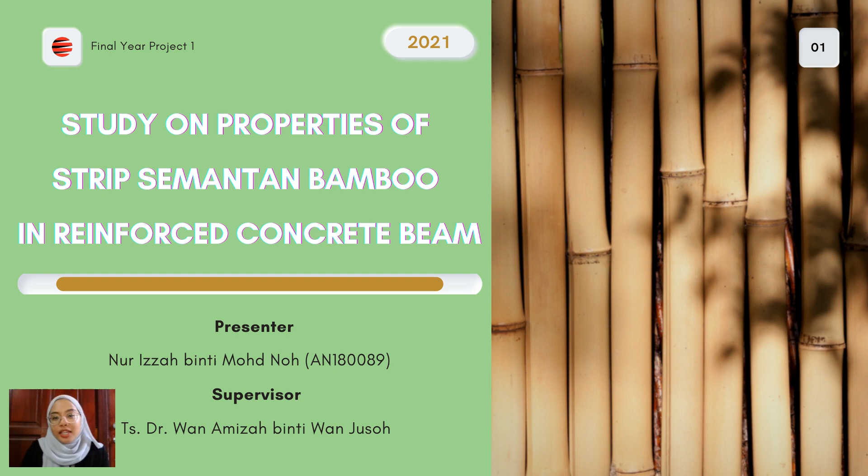Today I will be presenting my proposal entitled Study on Properties of Strip Semantan Bamboo in Reinforced Concrete Beam. In this proposal report, I'll be highlighting the introduction, problem statement, objective, scope of study, methodology, expected outcome and also references.

Based on previous study, it is stated that bamboo implementation in structural reinforcement was established about 5 decades ago. Apart from that, much research and work has been done to enhance its application in structural elements, either with treatment or not. On top of that, over the years, BRC has been exploring various types of bamboo species in the world to find the most suitable and strong species as a steel reinforcement replacement.

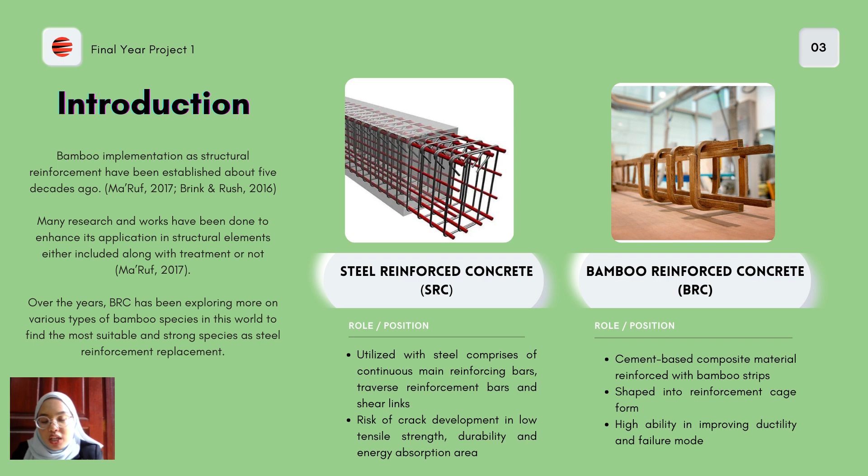As you can see in my slide, I have differentiated between steel reinforced concrete and bamboo reinforced concrete. Steel reinforced concrete is utilized with steel comprising continuous main reinforcing bars, transverse reinforcement bars, and shear links. It has a risk of crack development in low tensile strength, durability, and energy absorption areas. Meanwhile, bamboo reinforced concrete is a cement-based composite material reinforced with bamboo strips. It is shaped into a reinforcement cage form and has high ability in improving ductility and failure mode.

For my study, I would like to emphasize 3 problem statements. The first one is that the conventional method of reinforcement using steel leads to adverse environmental impacts such as high energy consumption during the manufacturing process and emission of carbon dioxide. The second one is the limited utilization of bamboo in civil engineering structural construction, despite its powerful properties and abundant availability in Malaysia. And the last one is steel reinforced concrete facing failure and deflection once a critical load is applied. Therefore, concrete with continuous reinforcing bars deals with the risk of crack development in low tensile strength, durability, and also energy absorption areas.

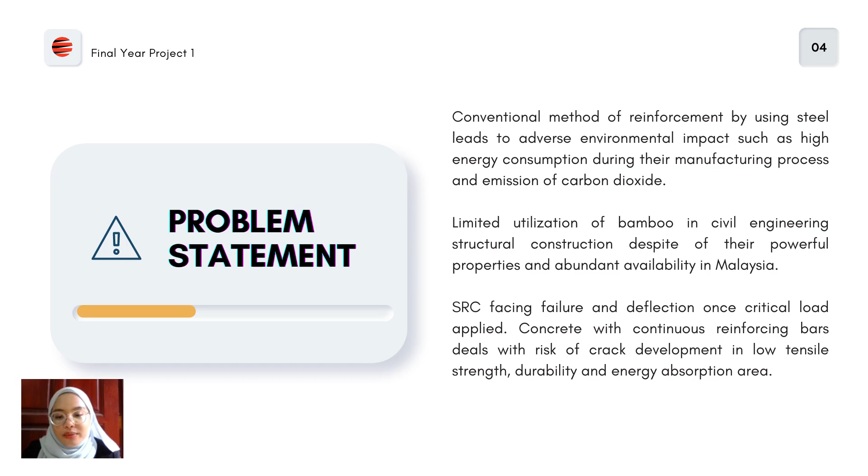Next, for this study, my objectives are firstly to characterize the physical treatment process of Semantan bamboo to be utilized in bamboo reinforced concrete. The second one is to determine the mechanical properties of bamboo reinforced concrete. And the last one is to verify the application of bamboo strips as reinforcement in bamboo reinforced concrete beams.

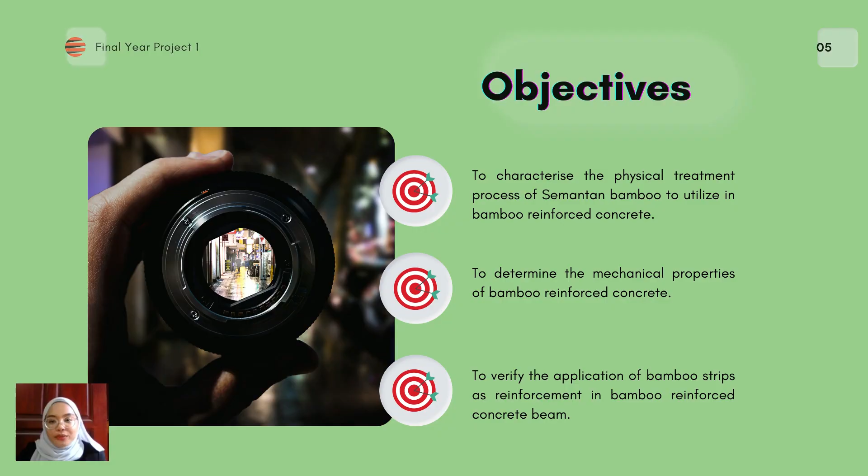For the scope of study, I use Semantan bamboo of 3 to 4 years maturity, ranging from 60 mm to 150 mm, with 3 meters tall. Next, I use a boric acid treatment process for treating bamboo culms before they are utilized in the bamboo reinforced concrete beam model. Third, my compressive strength test will follow BS. The flexural test will also follow British Standard. The water absorption test will follow ASTM and my slump test will follow British Standard also. Next, I will use a total of 36 concrete cylinders for compressive strength, water absorption and UPV tests, and another 18 concrete beams for the flexural test.

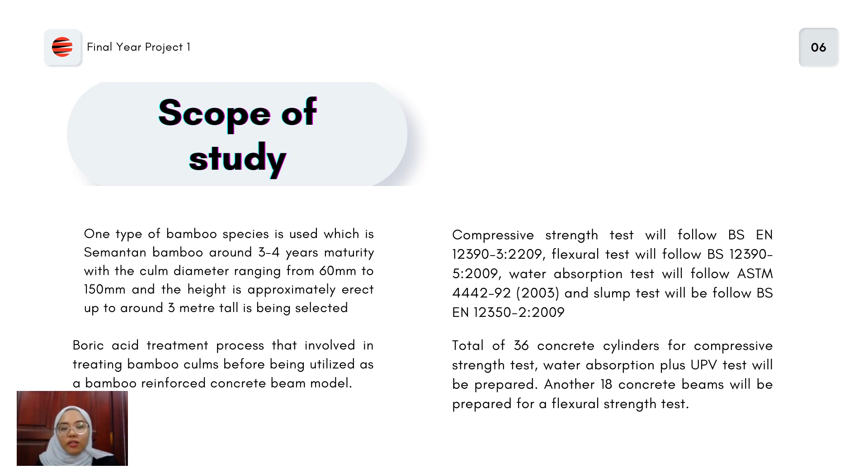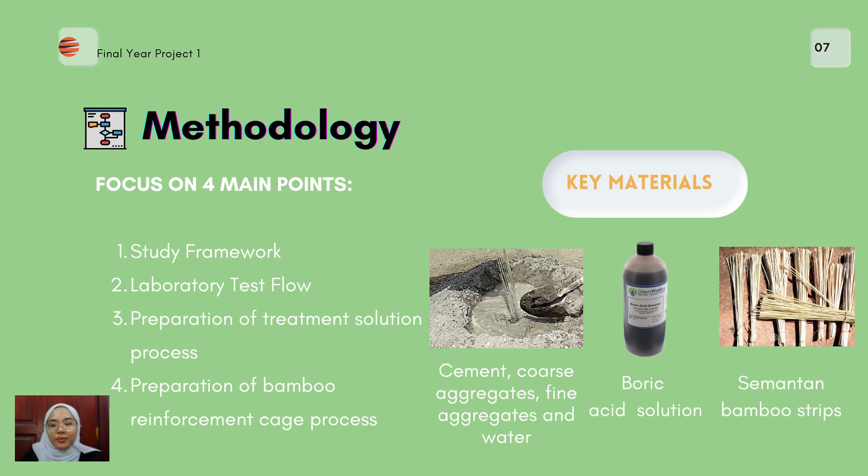For the laboratory test flow, it will involve 5 different actions and steps. The first one is material preparation of concrete, treatment solution, and bamboo reinforcement cage. The second will be conducting a slump test. The third action will be a total of 36 samples of concrete cylinders and 18 beams are produced.

The fourth one, 36 concrete cylinders are being cured at 7 and 28 days. Meanwhile, 18 beams are being cured until 28 days only. The last one, compressive strength, flexural strength, water absorption, and UPV tests will be conducted.

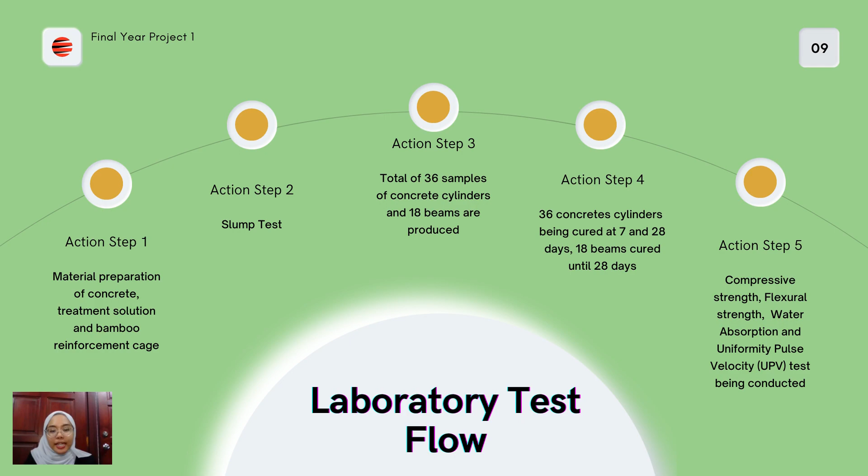In the preparation of the treatment solution process, the first step will be cleaning out the bamboo using water. The second step will involve perforating the bamboo nodes by making holes for easier and faster penetration. Third, it will be submerged in boric acid treatment solution within 6 to 20 days, depending on the solution's concentration. And the last one, letting the bamboo culms aside to drain the excess boric solution.

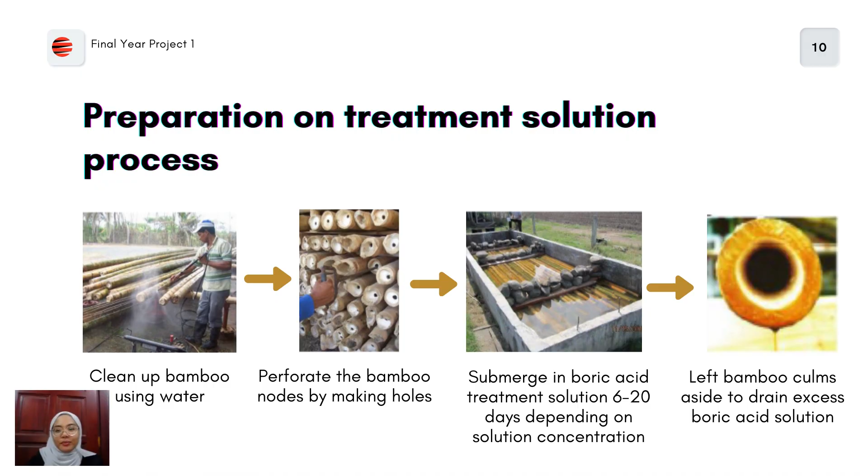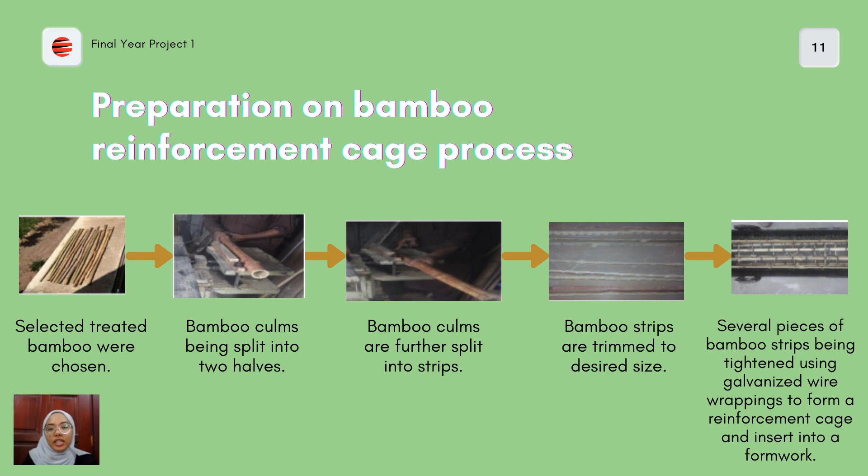Next, for the preparation of the bamboo reinforcement cage process, the first step involves choosing selected treated bamboo. Second, bamboo culms are split into two halves. Third, bamboo culms are further split into strips. Fourth, bamboo strips are trimmed to a desired size and thickness. And lastly, several pieces of bamboo strip are tightened together using galvanized wire in order to form a reinforcement cage, which can then be inserted into a formwork.

On top of that, I've determined a mix proportion of concrete by using the DOE method. As you can see on this slide, on the left side, I've shown specimen details of my study. Meanwhile, on the right side, I've posted quantities required for the concrete matrix and also quantities required for samples of concrete.

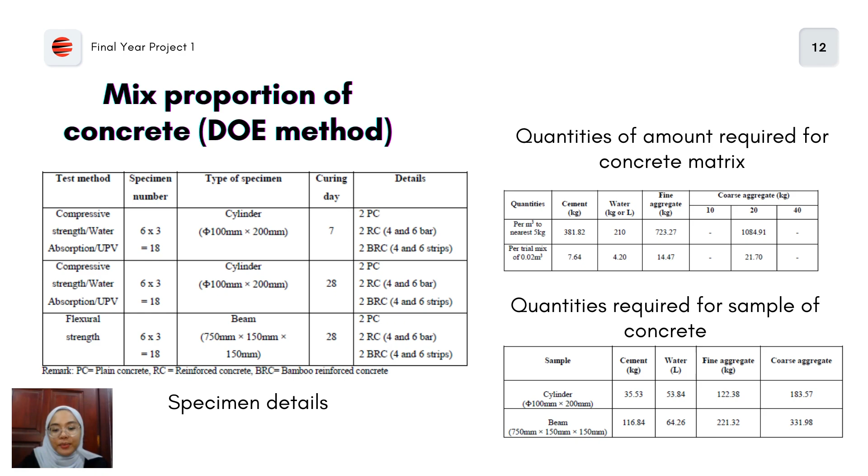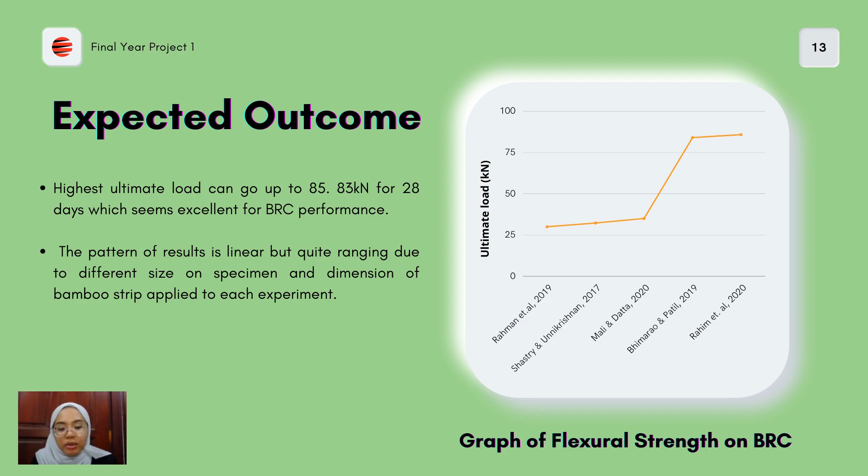For the expected outcome, I've come up with a graph on flexural strength of BRC. As you can see, I've differentiated between 5 different authors, with the highest ultimate load recorded by Bhimarao and Patil 2019 with a reading of 85.83 kN ultimate load. Therefore, the pattern of results is linear but quite ranging due to different specimen sizes and dimensions of bamboo strips applied in each experiment.

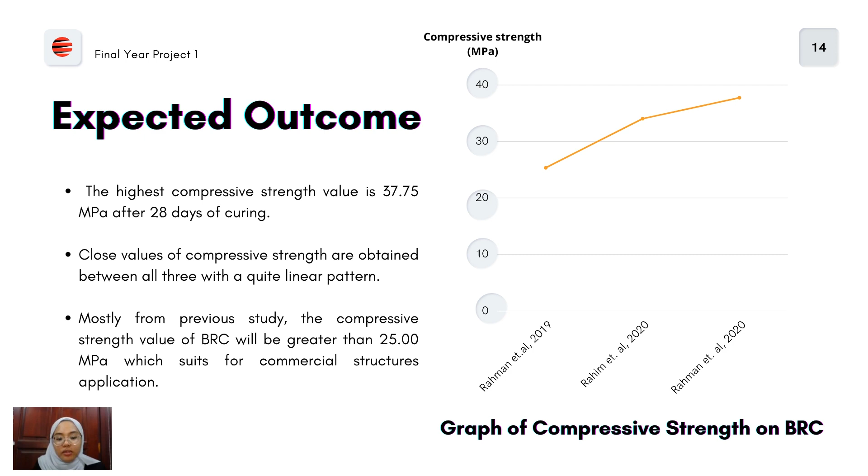The second expected outcome is a graph of compressive strength of BRC. As you can see, I've differentiated between 3 different authors, of which Rahman showed the highest compressive strength value for 28 days. Apart from that, it shows close values of compressive strength are obtained between all 3 with a quite linear pattern. Mostly, from previous studies, the compressive strength value of BRC will be greater than 25 MPa, which suits commercial structure applications.

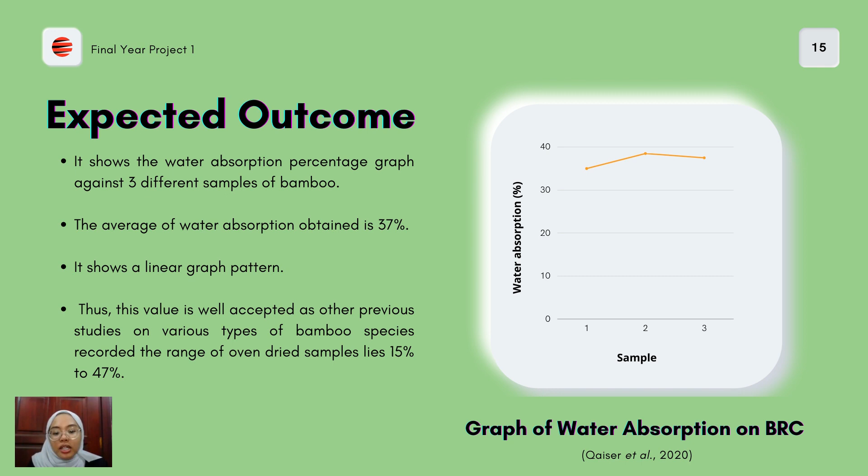For the third expected outcome, I've come up with a graph on water absorption for BRC. In this graph, it involves 3 different samples to find the best percentage of water absorption, and the second sample showed the highest value. This graph also shows a linear pattern. Thus, this value is well accepted, as other previous studies on various bamboo species recorded the range of oven-dried samples between 15% and 47%.

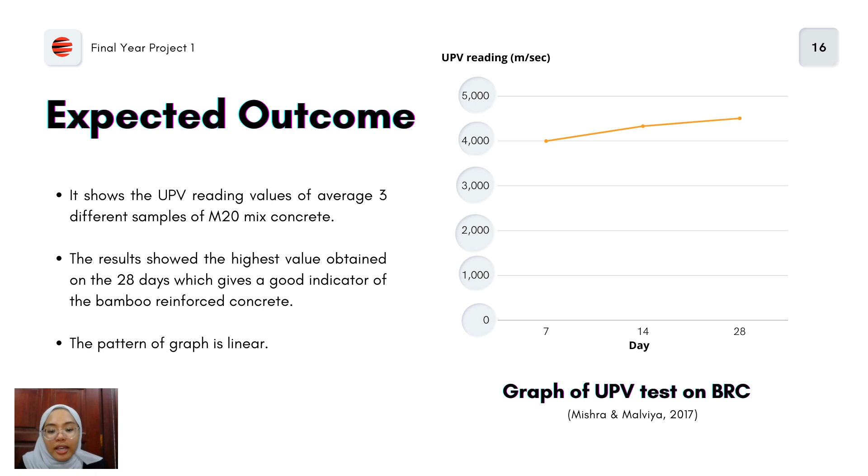For the fourth expected outcome, I focus on the graph of the UPV test on BRC, which was conducted by Mishra and Malviya in 2017. As the observation, it shows the UPV reading value of an average of 3 different samples of M20 mix concrete. The results show the highest value obtained at 28 days, which gives a good indicator of the bamboo reinforced concrete. And this graph shows a linear pattern.